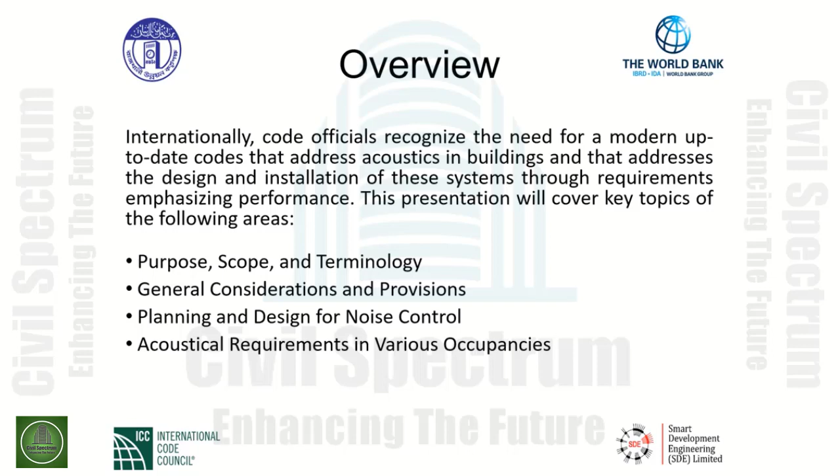The goal of this training is for you to learn and apply key code requirements contained in Chapter 3, titled Building Acoustics, to enhance your performance while inspecting these systems. This training will also provide participants with specific code requirements with examples related to design, installation, and inspection of building acoustic systems to further enhance your knowledge.

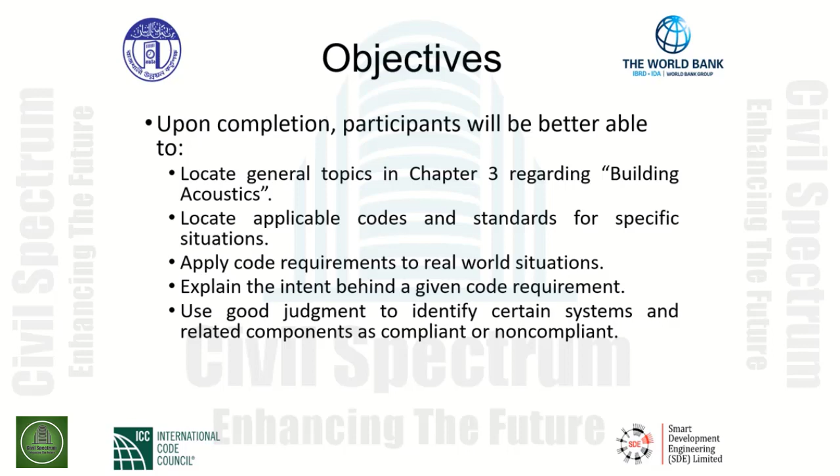Our course objectives today are as follows. Upon completion, participants will be better able to locate general topics in Chapter 3 regarding building acoustics, locate applicable codes and standards for specific situations, apply code requirements to real-world situations, explain the intent behind a given code requirement, and use good judgment to identify certain systems related components as compliant or non-compliant.

Chapter 3, Section 3.1, titled Purpose. The purpose of this chapter is to provide codes, recommendations, and guidelines for fulfilling acoustical requirements in buildings.

A building acoustics code cannot be effective without adequate provisions for its administration and enforcement. Noise transmission can affect the quality of life of a building's inhabitants, and therefore the code official has the responsibility for establishing that these buildings where citizens work and reside are designed and constructed to address building acoustics.

As you can imagine, if we were working in an office building and the mechanical refrigeration room, maybe a chiller room or other equipment, is adjacent to office spaces, this could provide many undue noises transmitting through the building's components and disturb workers while working.

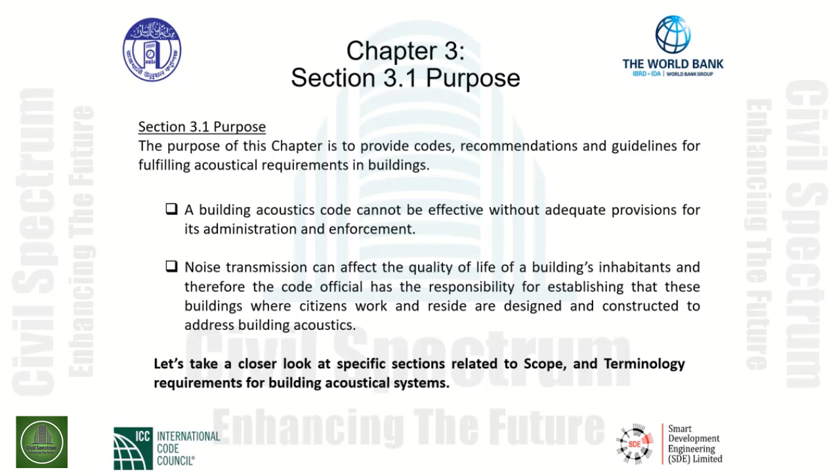We will take a closer look at many of these sections and go through some design examples related to building acoustics, and requirements within this code. Let's take a closer look at specific sections related to scope and terminology requirements for building acoustical systems.

Section 3.2, Scope. This chapter specifies planning, design, and construction codes, recommendations and guidelines on spatial, architectural, and technical aspects of acoustics within or outside buildings to ensure acoustical performance, comfort, and safety. Planning and design aspects are discussed generally and also particularly for buildings with different occupancies.

This section describes the types of building acoustics covered by the code. The code is applicable from the initial design of the system through post-construction where performance is evaluated. Additionally, the scope of the code is primarily focused on building acoustical systems, those items specifically addressed in the code that make a building functional, comfortable, and safe.

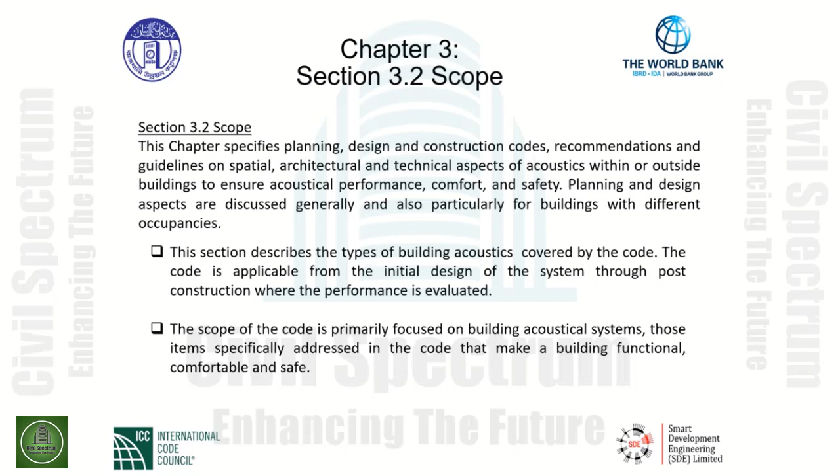Section 3.3, titled Terminology. This section provides meanings and definitions of terms used in and applicable to this chapter of the code. The terms are arranged in alphabetical order. In case of any contradiction between a meaning or a definition given in this section and that in any other part of the code, the meaning or definition specified in this section shall govern for interpretation of the provisions of this section.

A code provision could be misinterpreted if the definition of a term as used in the context of the code is not understood. The following slides will provide key definitions that will assist the code user to properly understand certain terminology related to this chapter.

Codes, by their very nature, are technical documents. As such, literally every word, term, and punctuation mark can add to or change the meaning of the intended result. This chapter contains several terms that are important to understanding the provisions of this code. Definitions are found both in this chapter and throughout the code. Let's look at some key terminology relating to building acoustics.

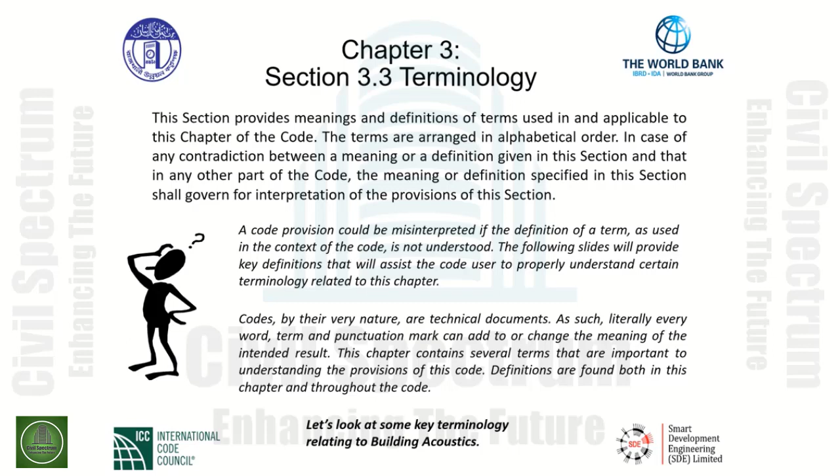The term dBA is a sound pressure level measurement when the signal has been weighted with the frequency response of the A curve. The dBA curve approximates the human ear and is therefore used most in building acoustics. dBA is essentially a weighted scale for referencing loudness that corresponds to the hearing threshold of the human ear. It's a nonlinear curve that's referenced regarding decibels and frequency responses accordingly.

There are other scales that can be used, such as a C-weighted scale, a B-weighted scale, and a Z-weighted scale, but these do not reflect the human ear and the threshold for hearing of human ears.

The next definition is frequency. The frequency of sound is the number of vibrations per second of the molecules of air generated by the vibrating body. One complete movement to and fro of the vibrating body is referred to as a cycle. Frequency is expressed as the number of cycles per second. It is also referred to by its unit as hertz, abbreviated Hz.

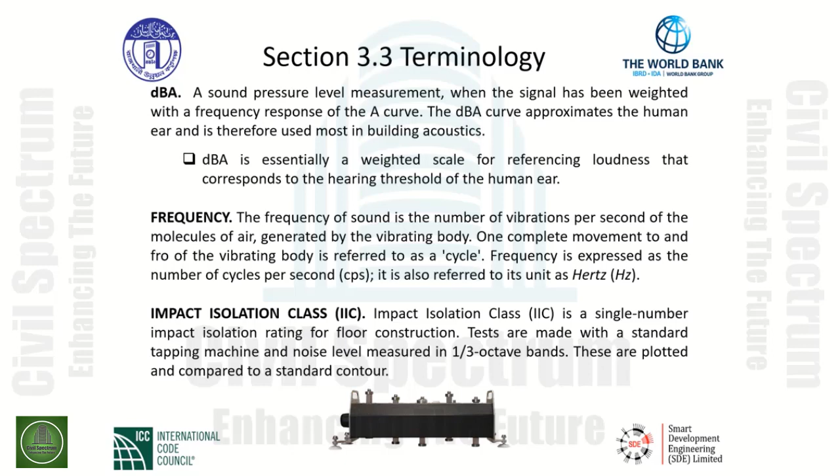Reverberation is the prolongation of sound as a result of successive reflections in an enclosed space, when the source of the sound has stopped. Consider a room with many hard surfaces: once a sound within the room is initiated, the sound will bounce off of very hard surfaces for a prolonged period of time. This is called reverberation.

The reverberation time, RT abbreviated, of a room is defined as the time required for the sound pressure level in a room to decrease by 60 decibels after the sound is stopped, and is calculated by the formula RT equals 0.16 times V over A plus X times V, where RT is the reverberation time in seconds, V is the room volume in meters cubed, A is the total room absorption in meters squared (the unit is Sabin), and X equals the air absorption coefficient.

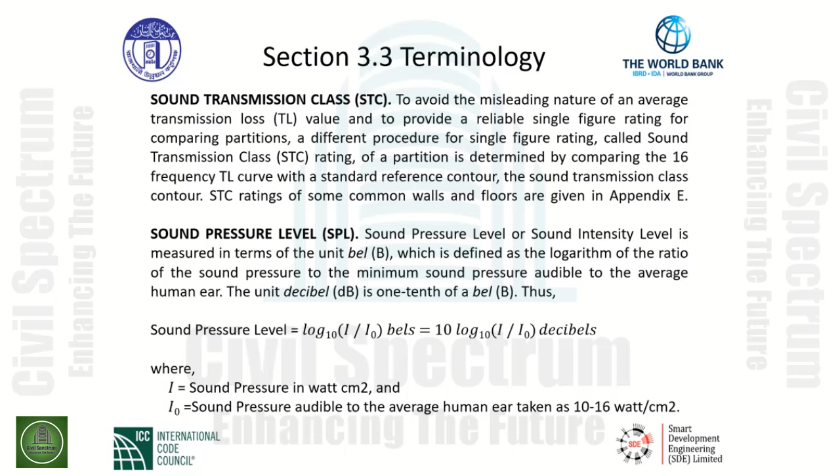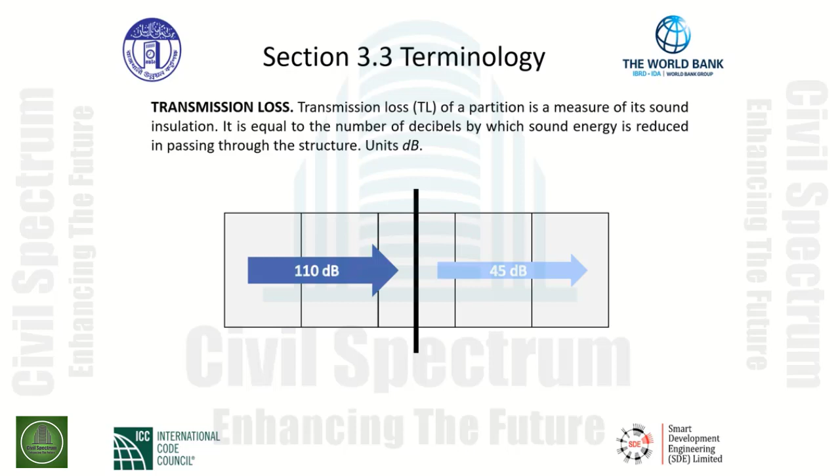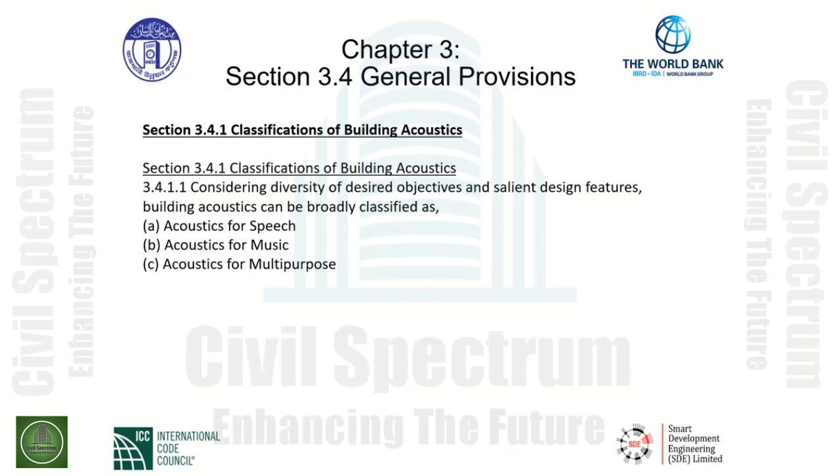A building or building complex is usually a group of spaces or rooms intended for various functions. The requirements of section 3.4.1.2 provide that those spaces may require involvement of different types of acoustics as stated in table 8.3.1. For example, a school has spaces for speech, such as a classroom; music, such as a music room; and multi-purpose, such as an auditorium.

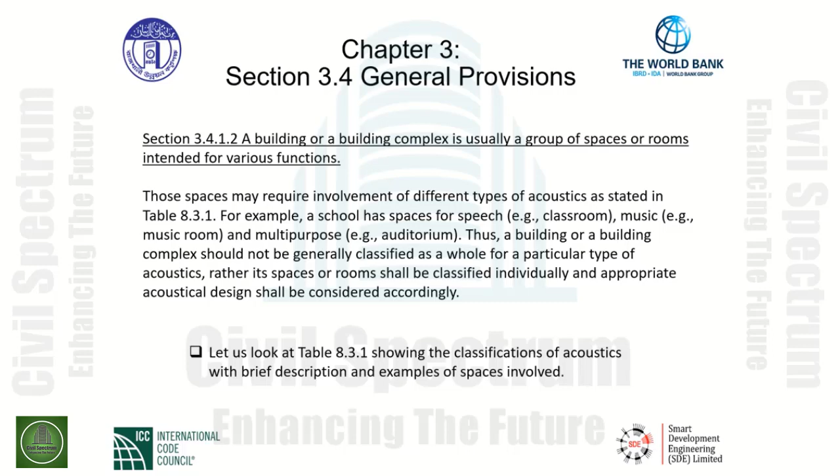Thus, a building or building complex shall not be generally classified as a whole for a particular type of acoustics. Rather, its spaces or rooms shall be classified individually, and appropriate acoustical design shall be considered accordingly. Let us look at table 8.3.1 showing the classifications of acoustics with brief description and examples of spaces involved.

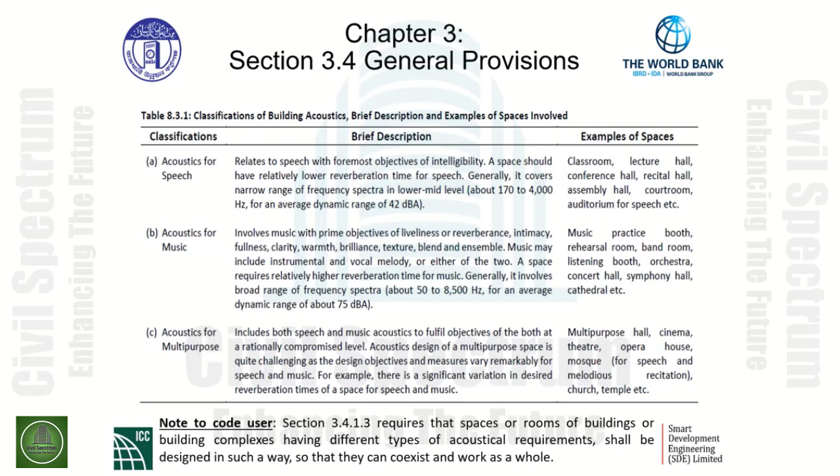Section 3.4.2 is acoustical planning and design targets. Specifically, section 3.4.2.1 states that a space involving either of the acoustical types in section 3.4.1 - speech, music, or multipurpose - must achieve a few design targets. Some of these important design targets are mentioned below.

Item A: noise exceeding allowable limit should be controlled. Item B: speech intelligibility should be satisfactory. Item C: music should have liveliness, intimacy, fullness, clarity, warmth, etc. Item D: the design sound level must be optimum to be heard properly. Item E: diffusion of sound throughout the whole space. Finally, item F: there should be no defects such as echoes, flutter echoes, etc.

Necessary planning and design measures shall be taken for achieving these targets to optimum levels or standards as dictated in this code. This is given to us in section 3.4.2.2, particularly with respect to the planning and design measures.

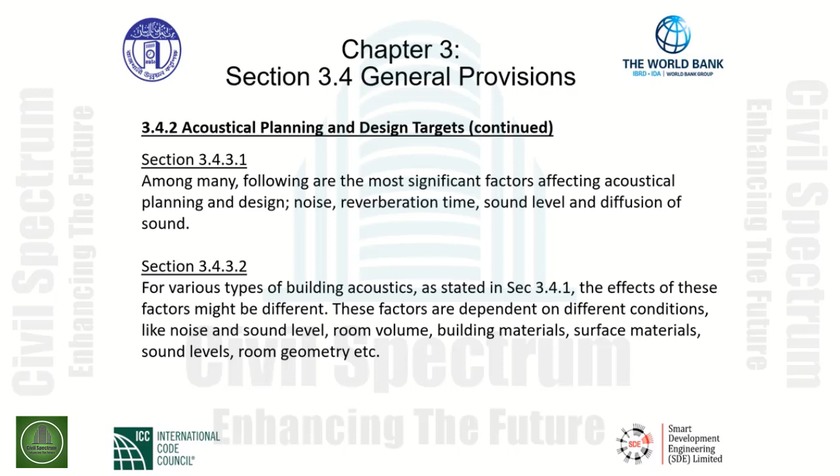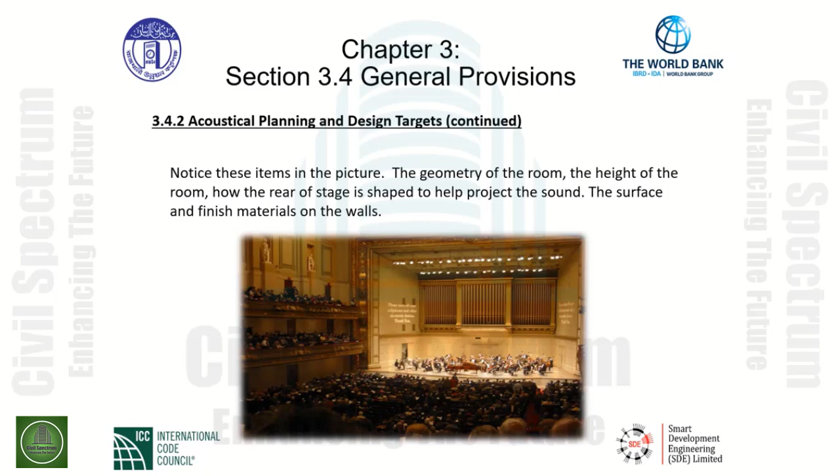General considerations and provisions for planning, design, assessment, and construction are stated specifically in section 3.4.4. Moving through this section, the very first section is 3.4.4.1. A reference is given here in Appendix F. A flow diagram summarizes activities required for planning, design, assessments, and construction related to building acoustics. We will be taking a look at Appendix F and the flow diagram coming up.

Section 3.4.4.2 indicates that acoustical planning and design, including all parts and details, shall be performed during the design phase of any project and must comply with standards and codes as dictated in this code.

Periodically, the code will indicate other forms of design, guides, standards, and references, typically in the appendices. The designer must take this into account and design accordingly.

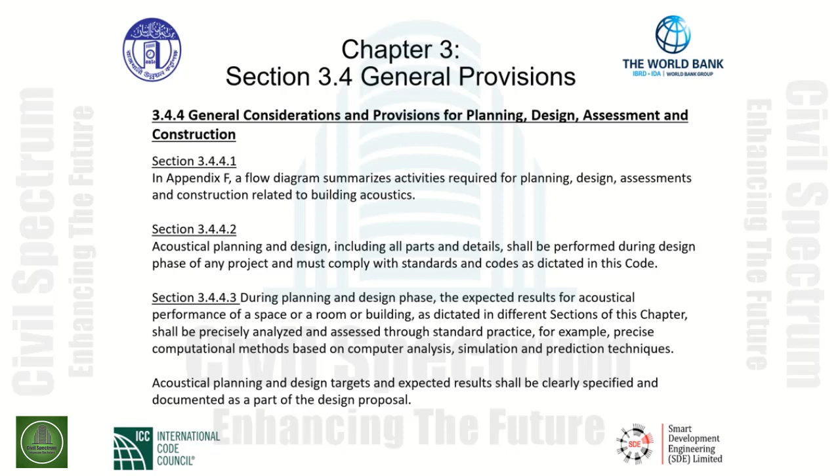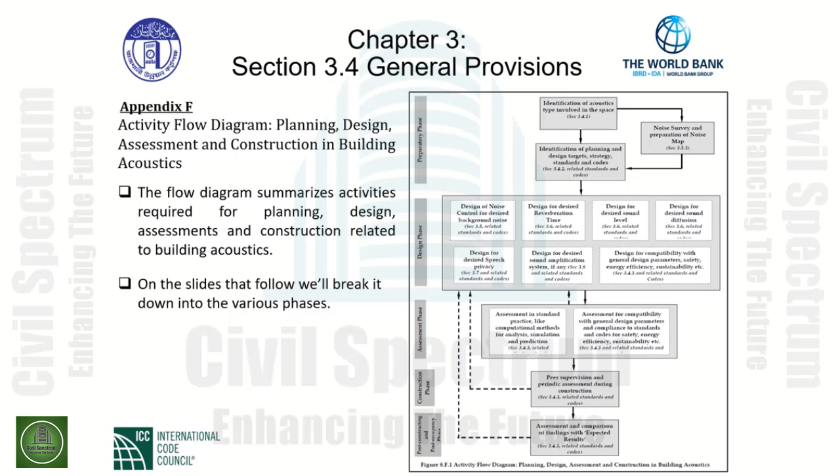The preparatory phase starts at the very top of the flow chart, where the engineer must identify the type of acoustics involved in the space. There's a reference to section 3.4.1, the area where classification of building acoustics is indicated. We need to consider the diversity of the desired objectives and the salient design features of the building acoustics. They are classified as acoustics for speech, acoustics for music, and acoustics for multi-purpose areas.

From that point, the identification of planning and design targets, strategy, standards, and codes comes in as part of the preparatory phase as well. The reference here is section 3.4.2, which covers acoustical planning and design targets. This is where we must achieve a few design targets.

Some of the design targets included: noise exceeding the allowable limit needs to be controlled; speech intelligibility must be satisfactory with respect to the design; music type classifications must have liveliness, fullness, and clarity; the desired sound level must be optimum to be heard properly, as well as diffusion of sound throughout the whole space must be taken into consideration. There also should be no defects such as echoing or flutter-type echo.

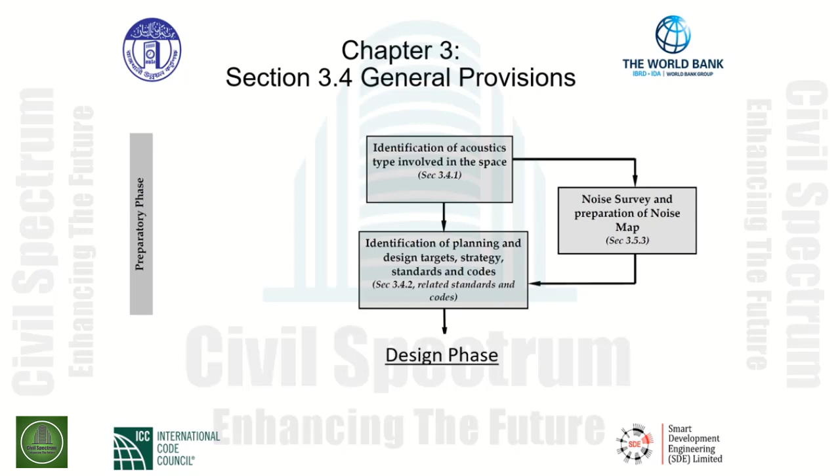The design phase: from the preparatory phase, we now integrate our findings and analysis into the design phase part of the flowchart. Here, the specific design criteria, strategies, and code requirements from the preparatory phase are put into play. This chart provides specific code-related criteria and relevant sections to find those criteria, which include the design of noise control for desired background noise.

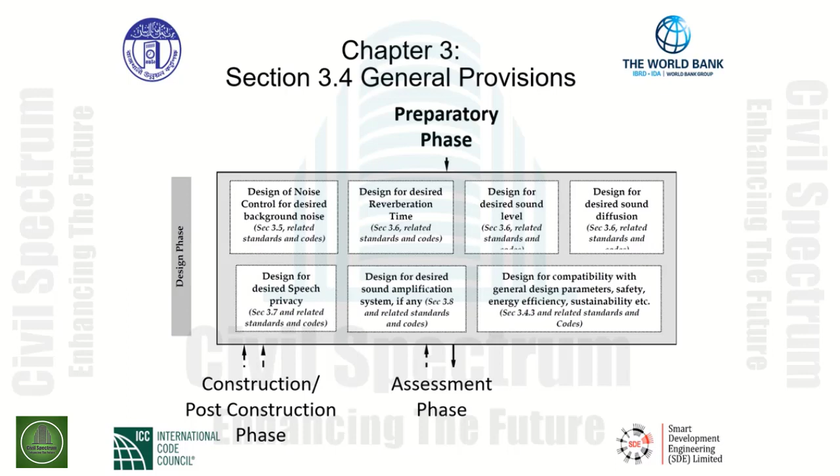Design for desired reverberation time, design for desired sound levels, design for sound diffusion at desired levels, as well as design for desired speech privacy and sound amplification systems if applicable, and design for compatibility with general design parameters such as safety, energy efficiency, sustainability, etc.

The last categories of the flowchart consist of the assessment, construction, post-construction, and post-occupancy phases. During the assessment phase, the design is reviewed and further analyzed to verify the desired acoustical performance. If during the assessment, portions or all of the design are found to be incorrect or need modification, the project will go back to the design phase for correction.

Once through the assessment phase, the project moves to the construction phase, where periodic assessment of the actual acoustic performance of the design is conducted. If during these assessments the performance is determined to not be acceptable, it will go back to the design phase again for redesign of non-compliant portions. In the post-construction phase, the final assessment is completed to verify the expected results from the design.

Section 3.5, Planning and Design for Noise Control. Types of noise is specifically referenced in Section 3.5.1. Depending on the location of the source, noise might be of two types.

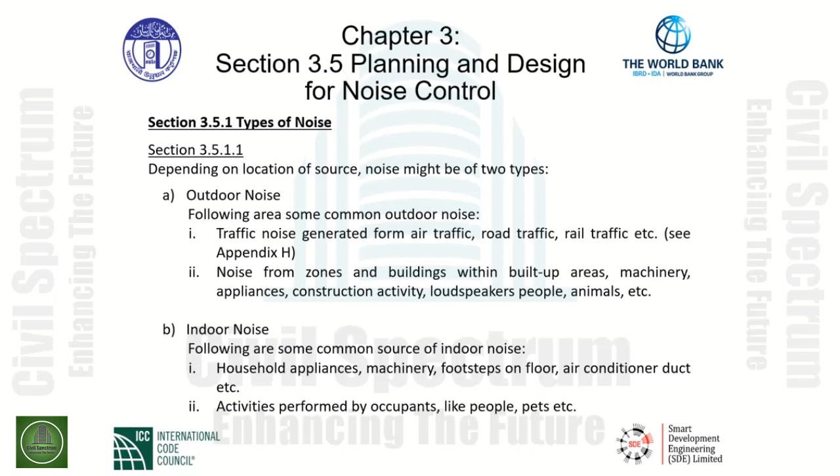Design sequence for noise control, Section 3.5.2, 3.5.1.1. In order to achieve noise control effectively, measures should be taken in the following order.

Item A, suppression of noise at its source. If the designer or the analysis shows that there is a projection of noise at a source, this may be the area to provide some sound attenuation.

B, layout planning is of concern as well. Simply by changing the layout direction, this may significantly reduce noise effects.

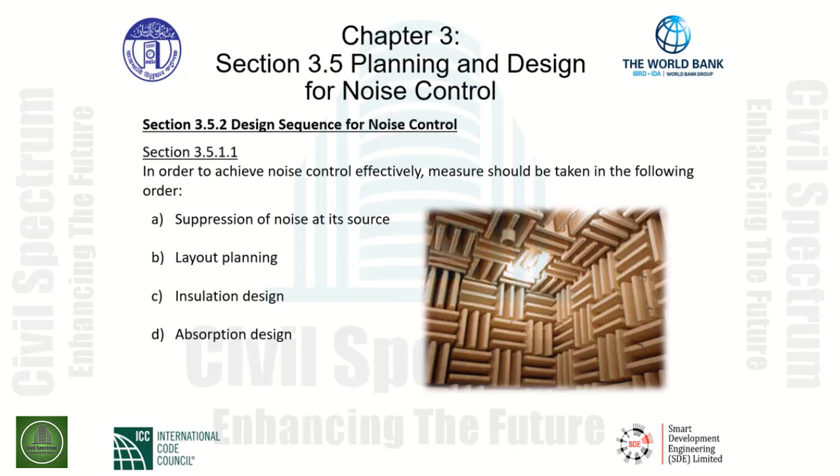Item C, insulation design, maybe by encapsulating the volume of the area with sound insulation. This may be an option with respect to noise transmission. Absorption design as well is indicated in item D. So there are various different sequences for designing noise control.

A noise survey is indicated in section 3.5.3.4. A noise survey shall be conducted and a noise map shall be prepared to identify source type, intensity, frequency, and other parameters of noise in and around the site of any specific project.

Noise levels should be measured for peak and off-peak hours of both working days and holidays, and also for daytime and nighttime as defined in Noise Pollution Control Rules 2006 and its subsequent amendments by the Government of the People's Republic of Bangladesh.

The reference here is to see Table 8.H.1 in Appendix H. The noise level shall be analyzed statistically for the following values.

Section 3.5.3.5, a noise map shall be used to examine compliance to the permissible upper limit of noise levels set for different land use zones in the Noise Pollution Control Rules 2006 and its subsequent amendments by the Government of the People's Republic of Bangladesh.

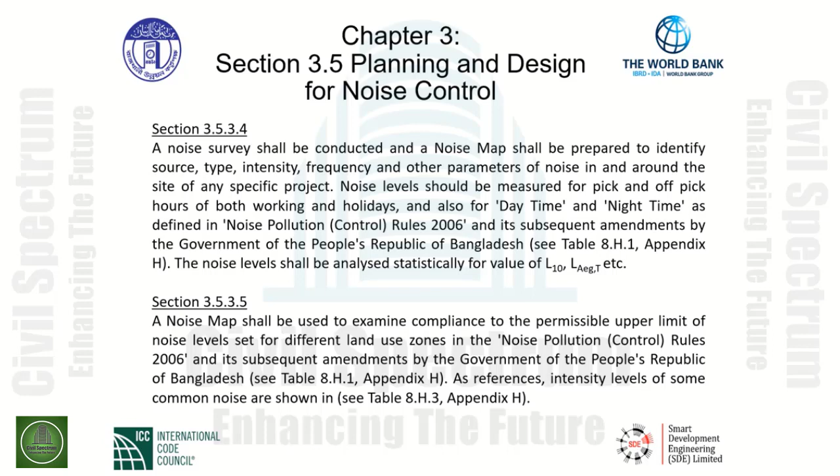Appendix H, specifically Table 8.H.1, titled Allowable Upper Limit of Outdoor Noise Levels. In the category of zones, we have the quiet zone, the residential zone, mixed use zone, commercial zone, and industrial zone. The upper limit of noise level in dBA is indicated for daytime and nighttime.

The daytime range is given from 6 a.m. to 9 p.m. The nighttime range is given in the last column from 9 o'clock p.m. to 6 o'clock a.m. For a quiet zone, in the daytime interval between 6 o'clock a.m.

and 9 o'clock p.m., we have an upper limit noise level of 50 dBA. The nighttime maximum upper limit noise level between 9 o'clock p.m. and 6 o'clock a.m. is an upper limit of 40 dBA.

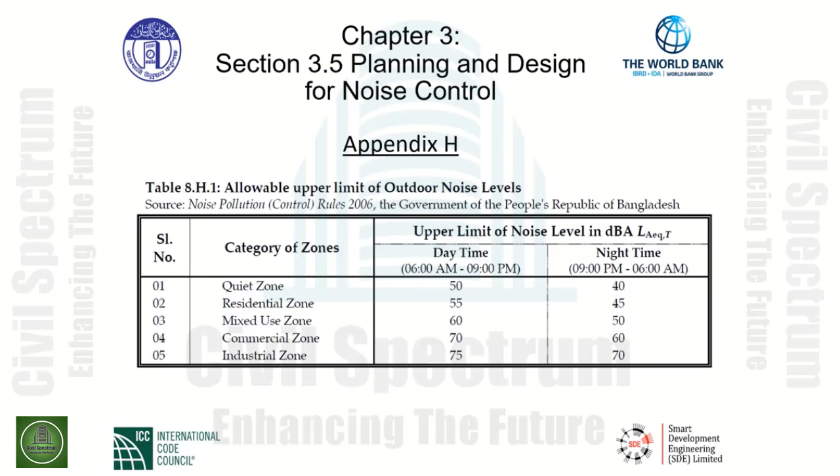When we look to an example such as a residential zone, the daytime upper limit is given at 55 dBA, where the nighttime is decreased by 10 dBA and has an upper limit of 45 dBA. The commercial zone indicates a daytime upper limit noise level of 70 dBA and a nighttime upper limit of 60 dBA. This table allows the designer to provide the design for these particular categories of zones, allowing upper limits indicated for daytime and nighttime operations.

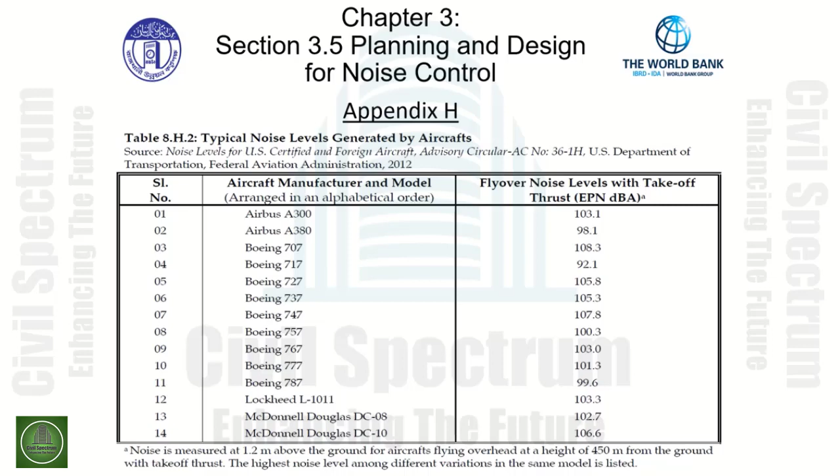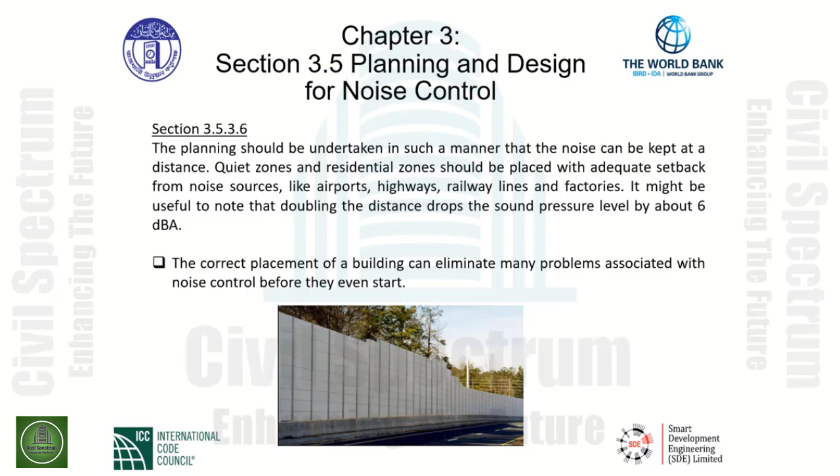The correct placement of a building can eliminate many problems associated with noise control before they even start. This way, it's advised that engineers analyze the site thoroughly for building placement along with the other designers, which could eliminate any noise problems simply by the orientation of the building and their respective areas of use within the building.

Let's consider a site where an apartment building will be located. The site is adjacent to a freeway. At 5 meters from the freeway, the sound pressure level was measured at 70 dBA. How far away does the building need to be located from the freeway to reduce the sound to 46 dBA? Let's apply the general rule of thumb of a 6 dBA reduction every time the distance is doubled.

At 10 meters, the sound level would be 70 dBA minus 6 dBA, resulting in 64 dBA. At 20 meters, the sound level would be 64 dBA minus 6 dBA, resulting in 58 dBA. At 40 meters, the sound level would be 58 dBA minus 6 dBA, resulting in 52 dBA.

We need to go through one more iteration and evaluate the building being at 80 meters away, and the sound level would be 52 dBA minus 6 dBA, resulting in our value of 46 dBA of sound pressure. The correct answer is approximately 80 meters, given this rule of thumb.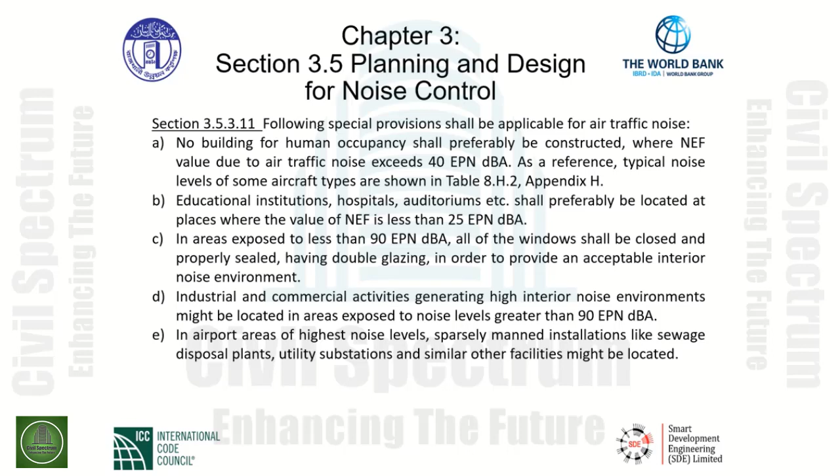Regarding road traffic noise, Section 3.5.3.12 provides us the following provisions. Item A, for road traffic noise level, the value of L10 shall be limited to a maximum of 70 dBA for zoning and planning new buildings in urban areas, while dwellings are proposed to have sealed windows.

B, the maximum permissible upper limit of L10 shall be reduced to 60 dBA when the dwellings are proposed to have open windows. As you can see, there's a reduction in dBA.

Item C. Major new residential developments shall preferably be located in areas where L10 levels are substantially lower than those specified above. Where L10 is greater than 70 dBA, design solutions such as barrier blocks, noise buffers, or purpose built noise barriers shall be utilized in order to reduce noise levels at least to that level.

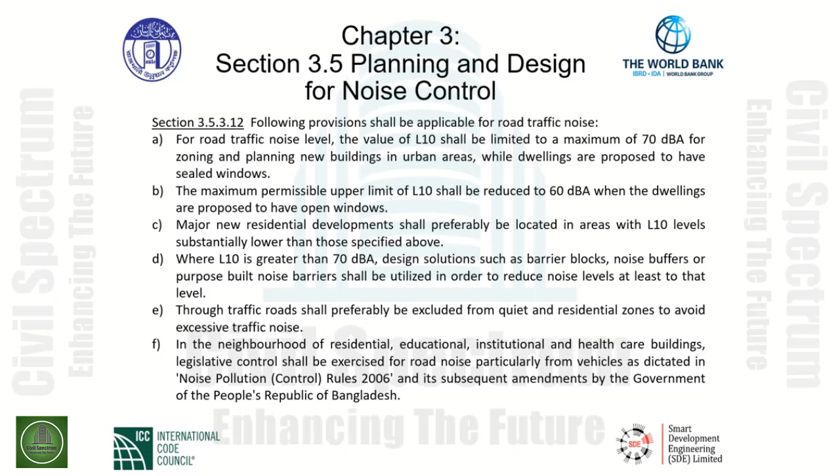And finally, item E. Through traffic roads shall preferably be excluded from quiet and residential zones to avoid excessive traffic noise. Item F. In the neighborhood of residential, educational, institutional, and healthcare buildings, legislative control shall be exercised for road noise, particularly from vehicles as dictated in Noise Pollution Rules 2006 and its subsequent amendments by the Government of the People's Republic of Bangladesh.

When it comes to rail traffic noise, Section 3.5.3.13 is referenced with the following provisions. Item A. No residential or public building except for the railway station and its ancillary structures shall preferably be connected to the railway lines.

Item B. Mercantile or commercial buildings should not abut the railway lines or the marshalling yards. Only planned industrial zones may be located beside the railway tracks.

Item C. In order to reduce the high noise levels produced at the arrival and departure of trains, platforms in railway stations shall be treated with sound-absorbing materials, particularly on the ceiling.

D indicates the main platform floor shall be separated from the station building with a minimum gap of 50 millimeters so that the ground or structure-borne vibrations are not transmitted to the building.

Item E. Windows and other openings shall preferably be placed as less as possible in the facade along the railway tracks. Item F. Greenbelts, landscaping, or any other form of barrier might be developed along the railway lines.

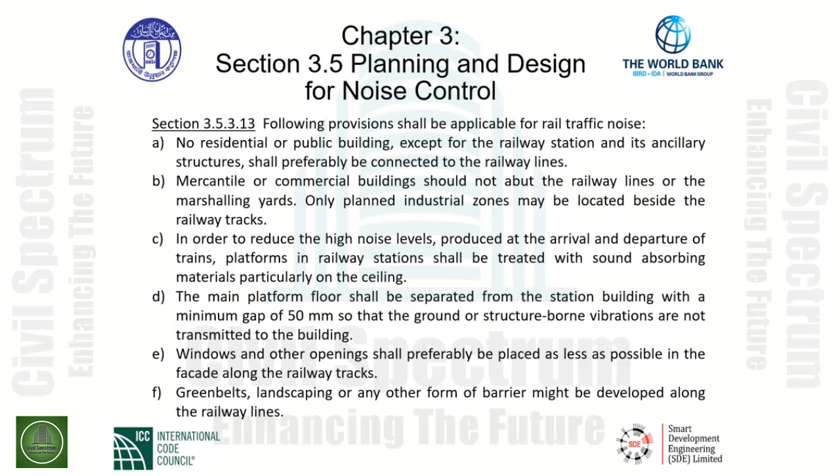Section 3.5.4 Planning and Design for Indoor Noise Control. The allowable upper limits of indoor background noise levels in dBA are shown in Table 8.3.2 and Figure 8D.1 in Appendix D. Design shall comply with recommended range of balanced noise criteria, the NCB curve, for different types of activity.

The allowable upper limits of indoor background noise levels in dBA are shown in Table 8.3.2 below. This indicates in the first column the type of space, such as broadcasting and recording studios. The dBA would be 18, and if we plot this on the NCB curve, we would have a value of 10.

The type of space, such as a classroom, a library, or even a small office, will give us a dBA ranging between 38 and 48. And the resulting curve, the NCB curve, would range between 30 and 40 on that particular curve.

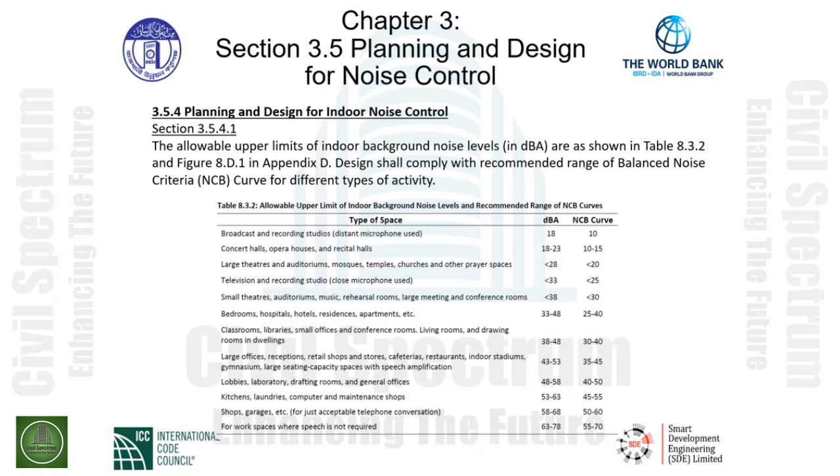Shops, kitchens, lobbies, and other workspaces where speech is not critical. So this is based on the type of space, and this is the allowable upper limit values regarding these spaces indicated in tabular form.

From Appendix D, a balanced noise criteria curve is pictured below, is used to specify acceptable background noise levels in occupied spaces. Instead of just a straight decibel pressure level, each decibel level is plotted over a frequency range. As you can see from the curve, at a lower frequency, a much higher decibel level of background noise is acceptable versus the same decibel level at a high frequency.

The recommended sound insulation criteria are classified in some grades given to us in section 3.5.5.1. The STC value for airborne sound insulation is graded as stated below. We are also referred to figure 8.D.2 in Appendix D. Item A, grade 1.

STC equals 55. Apply mainly to fully residential, quiet, rural, and suburban areas, and in certain luxury apartment buildings. This is grade 1.

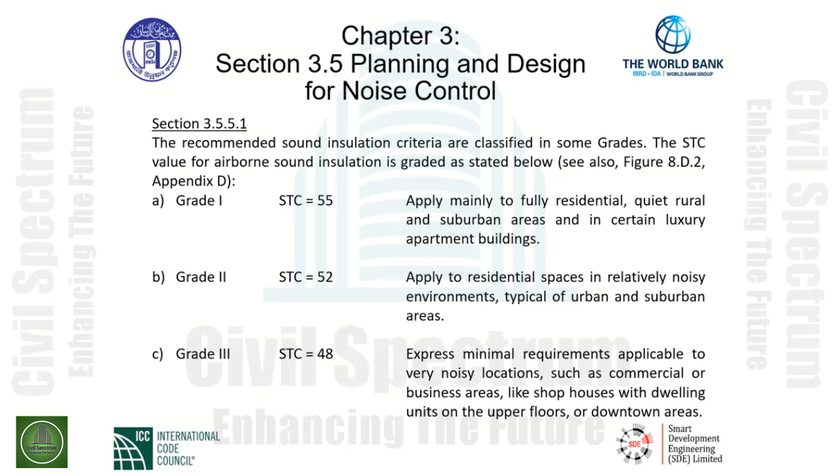Pictured here is a sample of a sound transmission class test. The test is conducted with measuring devices in two rooms, one source room and one receiving room. The sound pressure levels in both rooms are compared at one-third octave band frequencies from 125 to 4,000 Hertz. The difference between the rooms is used to calculate the transmission loss at the various frequency bands.

These transmission loss values, noted as ATL in the table, are plotted on a graph and compared to standard STC contours. Whichever curve is most closely resembled is the STC rating assigned to the assembly.

As we look at the graph, the solid line is the transmission loss values plotted at the various frequencies, and the dashed line is the standard curve for an STC of 56.

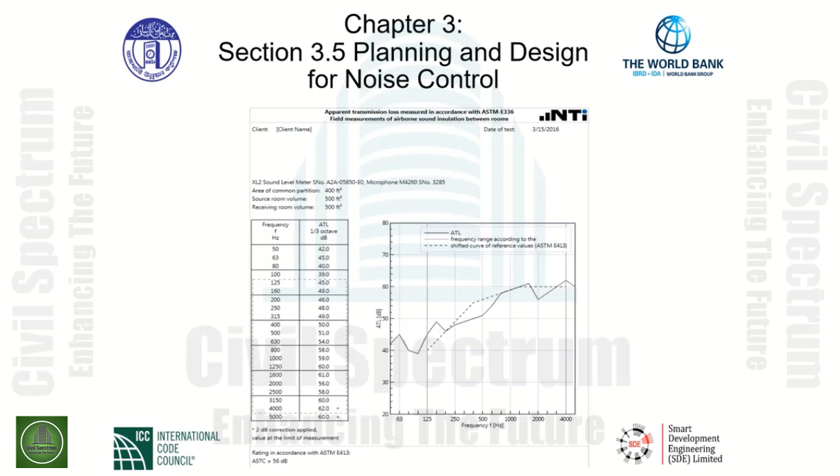The following tables are located in Appendix D and provide the approximate range of airborne sound insulation and impact sound insulation required or recommended between dwelling units. Sound transmission class deals with transmission of airborne sound, typically through walls, while impact insulation class deals with impact sound, typically through floors. So we need to make a distinguishing mark between the two.

With impact sound, as indicated, in both cases the higher rating signifies a better level of soundproofing. The grades of STC and IIC are also provided that align with the code.

As we look at the tables and graphs indicated here, we note in the first table we have our sound transmission loss in dB. The various grades are indicated towards the bottom of the table: grade 1, grade 2, and grade 3. This gives us the recommended sound insulation criteria found in section 3.5.5.1.

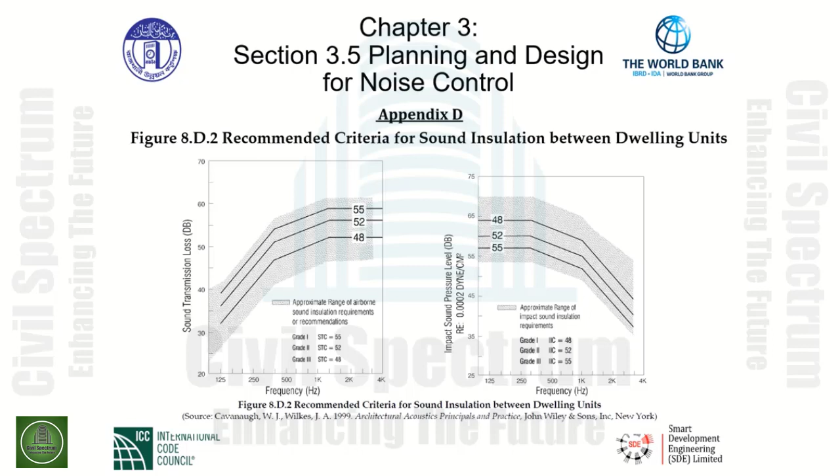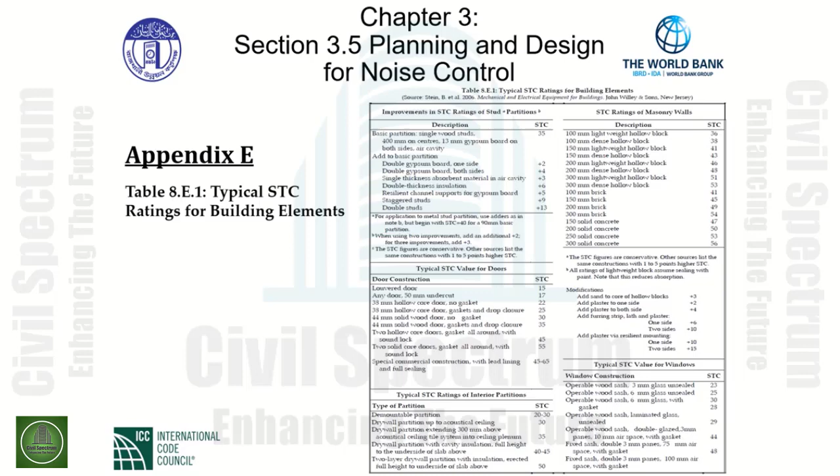As an example, using table 8.E.1 from the previous slide, design an improvement to STC ratings of stud partitions. Starting with the basic partition value of 35, increase the partition value to at least 46. Option 1: let's try adding resilient channel supports over the studs and adding an additional layer of gypsum board to both sides.

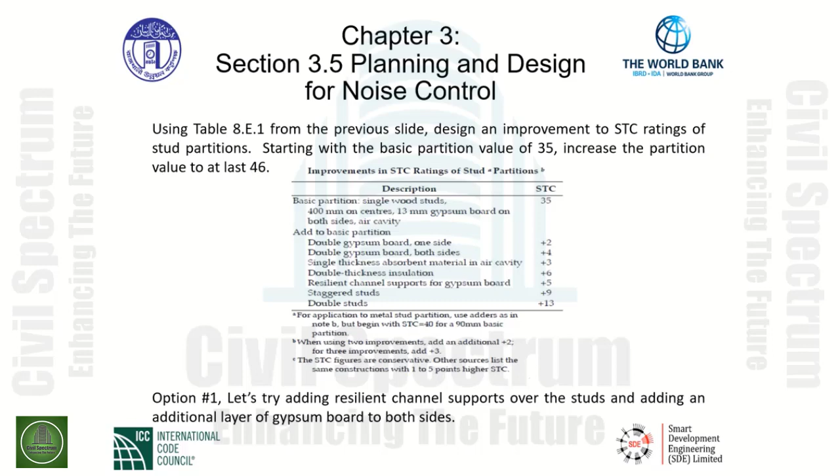As indicated, we take the basic partition, single wood studs at a base 35 STC rating. We add double gypsum board to both sides, which gives a value of +4, and resilient channel supports for the gypsum board add an additional 5. The total STC rating would then be 35 plus 4 for the double gypsum board plus 5 for the resilient channel supports, equating to 44, which is less than our needed 46.

It appears we still need additional improvements. Let's look at the table again. Upon following the table and locating note B below, we need to apply this particular note. Note B says when using 2 improvements, add an additional +2; for 3 improvements, add +3. For our particular method, we have 2 improvements, so we will add an additional +2 to our overall summation.

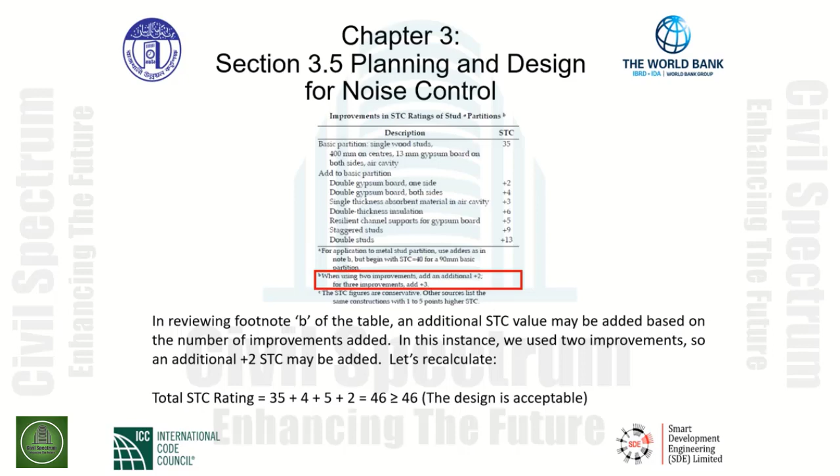Let's look at another option. Option number 2: let's substitute metal studs in lieu of wood studs, add an additional layer of gypsum board to one side, and install a single thickness absorbent material in the air cavity. When we do this, the first approach is to reference Note A to the table. It indicates for application to metal stud partitions, use adders in Note B, but begin with STC 40 for a 90 millimeter basic partition, and this is what we are going to utilize.

We're going to start with 40 in our equation and take the summation of various values to get the total STC of our assembly. From 40, we add 2 for the double gypsum board on one side. We add 3 for the single thickness absorbent material in the air cavity. And then we add 2 according to Note B of the table, which again indicates when using 2 improvements, add an additional +2. Therefore, our design is 47, which is greater than our resulting value previously of 46, and therefore the design is acceptable using metal studs with double gypsum board on one side and single thickness absorbent material in the air cavity.

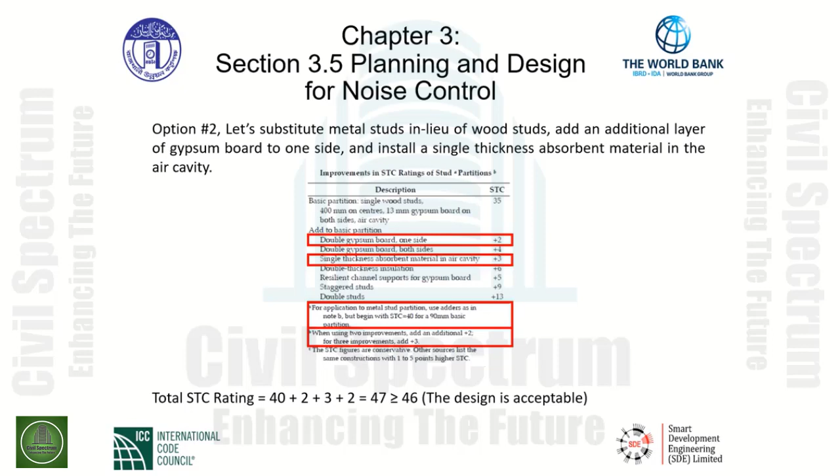Another table, such as Table 8.E.2, is also located in Appendix E and provides STC ratings for various occupancies and the spaces within those occupancies. The first column lists the different types of occupancy. The next column is the room within that occupancy under consideration, such as the main room or loud rooms within the occupancy. The third column is the space or room that is immediately adjacent to and separated from the room under consideration.

The next two columns, quiet and normal sound isolation respectively, are the STC values to be provided between the room under consideration and the adjacent areas.

As an example, we will apply the table as indicated for the type of occupancy. In our case, let's go down the table to executive areas, doctor suites, confidential privacy requirements. The wall, partition, or panel between these particular rooms of an office, when adjacent to the office we have a corridor or lobby indicated in the adjacent area column, the sound isolation requirement background level in the room being considered gives us a quiet STC rating of 45 or a normal rating of STC 42.

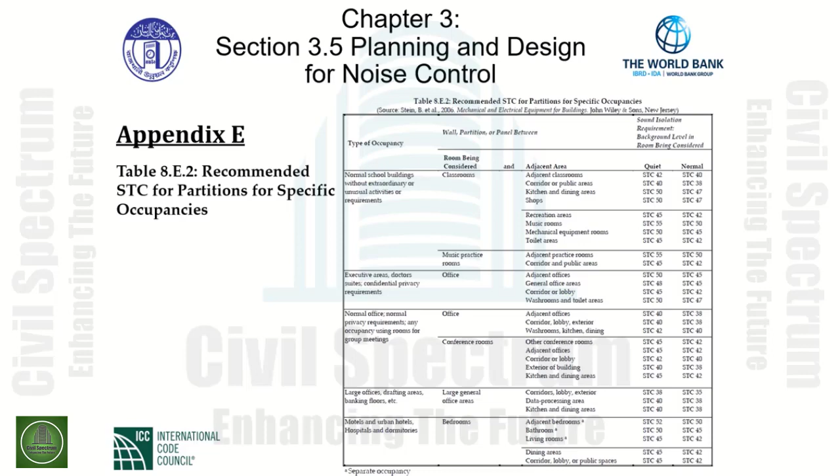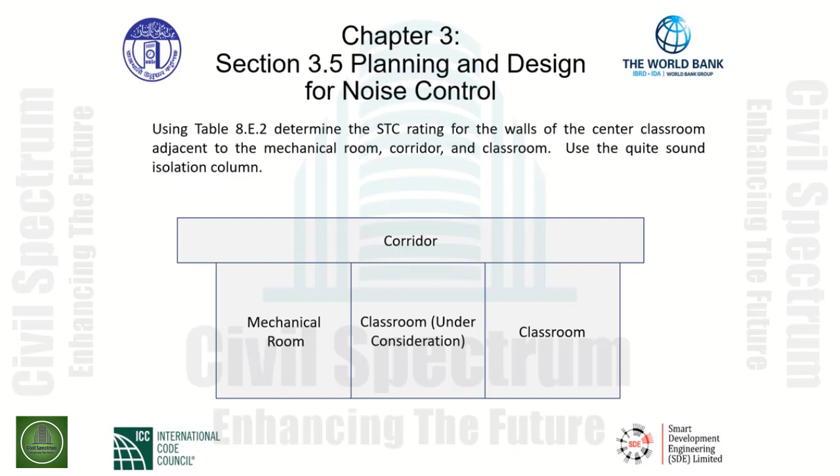Using Table 8.E.2, determine the STC rating for the walls of the center classroom adjacent to the mechanical room, corridor, and classroom. Use the quiet sound isolation column for this particular design. In this example, let's assume we have a classroom located in a school, with a mechanical room, classroom, and a corridor surrounding the classroom. From the previous table, let's determine the minimum STC rating for each wall.

We need to start with the room under consideration to navigate the correct portion of the table. Once there, we need to look at the adjacent area and match it to the actual use of the adjacent area. Once we locate the correct adjacent area, we follow that row over to the sound isolation requirement. In this case, we are directed to use the quiet column, so that's the value we will select.

The classrooms are indicated as the room being considered, as shown in the red box. The adjacent area to the classroom is an adjacent classroom. We will pick the STC value of 42 in the quiet column for the adjacent classroom. For the corridor or public areas, we will pick the STC rating of 40, again in the quiet column.

We move down to the lower level of the table to the mechanical equipment room that is adjacent to the classroom. We will pick an STC rating of 50 for the classroom separating the mechanical closet, as indicated.

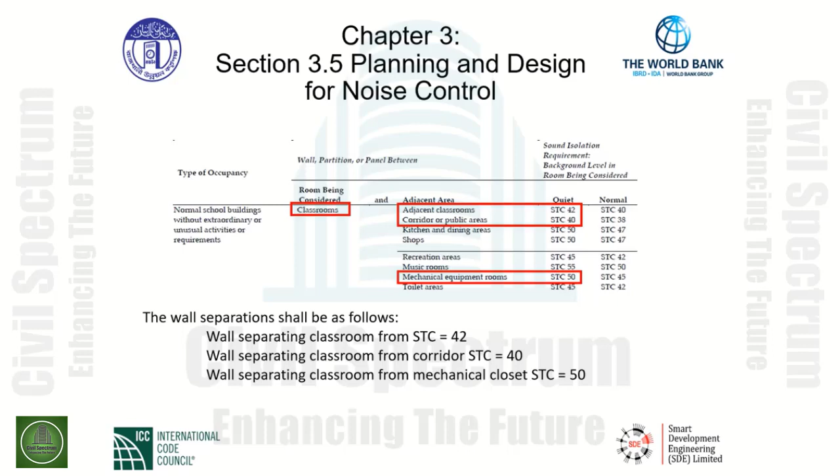Impact noise problems can be controlled in the following ways, given to us in section 3.5.6.1.

Preventing or minimizing the impact by cushioning it with resilient materials like floor tiles of rubber and cork, or carpeting on pads, with desired impact isolation class criteria for airborne and impact sound insulation of floor ceiling assemblies between dwelling units, tables 8.33 and 8.34.

Item B, floating the floor for isolating the impact floor from the structural floor by a resilient element is extremely effective. This element can be rubber or mineral wool batts, blankets, or special spring metal sleepers.

Item C, suspending the ceiling and using an absorber in the cavity. Item D, isolating all rigid structures such as pipes and caulking penetrations with resilient sealing.

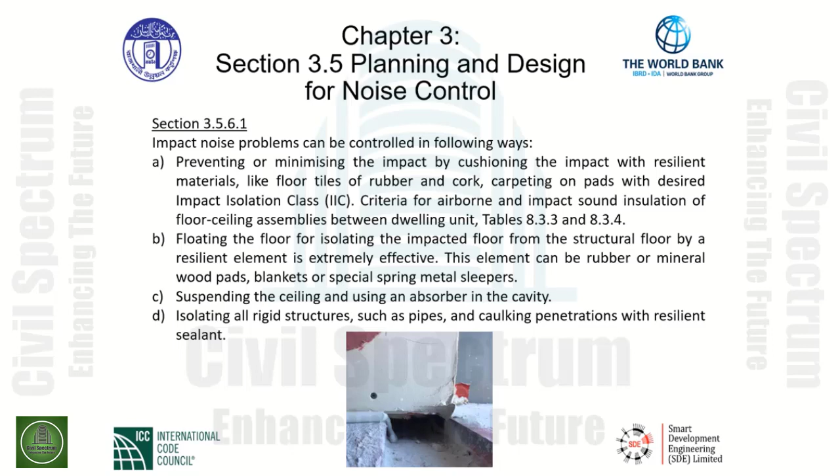Table 8.3.3, titled Airborne Sound Insulation of Partitions Between Dwelling Units. This table gives us requirements for partitions in dwelling units. For example, consider two apartments, A and B, that share a common wall.

A living room is located on the apartment A side of the wall, while a bedroom is located on apartment side B. I can locate this scenario in the table and determine the STC requirement. In this case, it is 54. Note that the STC is provided for grade 2.

Per the note of the table, if grade 1 or 3 were desired, I would add or subtract the value given. Also note that per note A, if there is a situation where spaces overlap and multiple STC values apply, the strictest will govern the rating of the partition. Notes are effective to the table.

Let's look at note A. Note A indicates wherever a partition wall may serve to separate several functional spaces, the highest criterion must prevail. Just above note A, it indicates for grade 1, add 3 points; for grade 3, subtract 4 points. As we can see, the third column of the table is based upon grade 2 STC requirements.

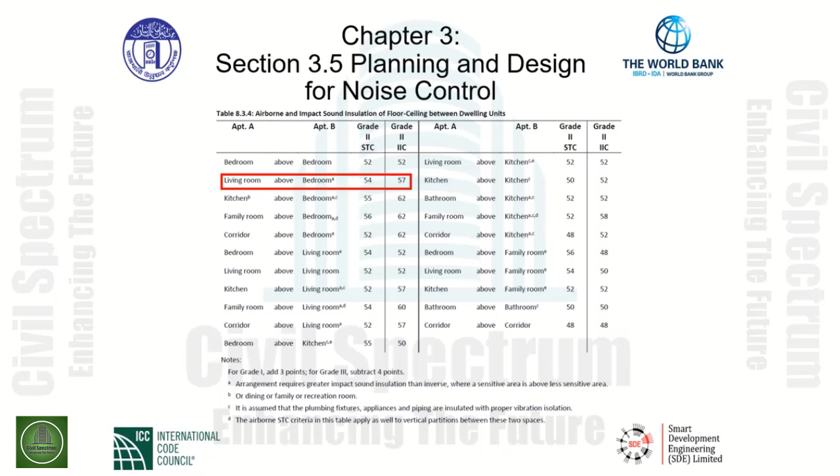Protection against the effects of noise exposure is given to us in section 3.5.8.1. We must protect against any type of noise exposure, provided when the sound level exceeds those shown in table 8.3.5.

Table 8.3.5 is given to us below, indicated as permissible noise exposure. The first column gives a sound level in dBA, which is a slow response. It ranges from 85 to 97 dBA. This is permissible noise exposure.

The duration is given in the second column, duration per day in hours and minutes. The permissible noise exposure at 85 decibels would give us a duration per day of 16 hours, 0 minutes. Whereas if we go down to 97 dBA, we have a duration per day of 3 hours, 2 minutes.

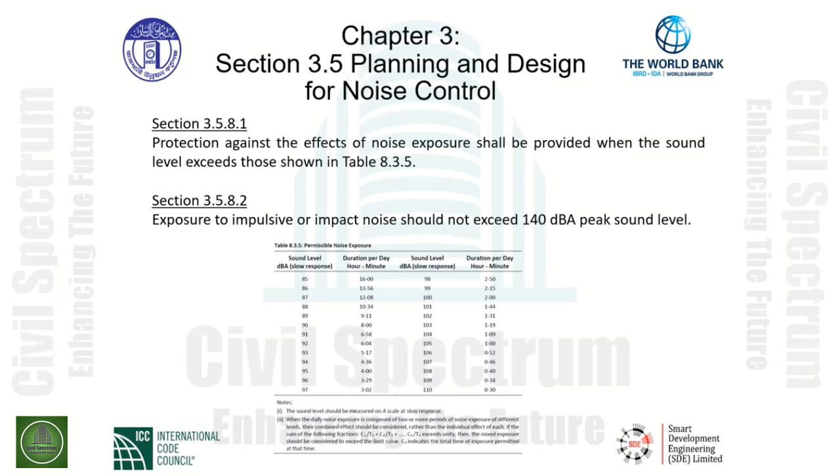Section 3.6, Reverberation Time, Sound Pressure Level, and Diffusion of Sound. General considerations are given in Section 3.6.1. For an overall performing, comfortable, and safe acoustical environment, along with the issues of noise, other significant aspects of acoustics should be considered. This shall include sound pressure level, reverberation time, and diffusion of sound.

Speech intelligibility is a significant parameter to achieve satisfactory acoustical design. Percentage syllable articulation, or PSA, is an index for assessing speech intelligibility. PSA can be expressed as the following. For English language, PSA equals 96 times the coefficients for average speech level, indicated in percentage. For Bangla language, PSA equals 93 times the coefficients for the average speech level.

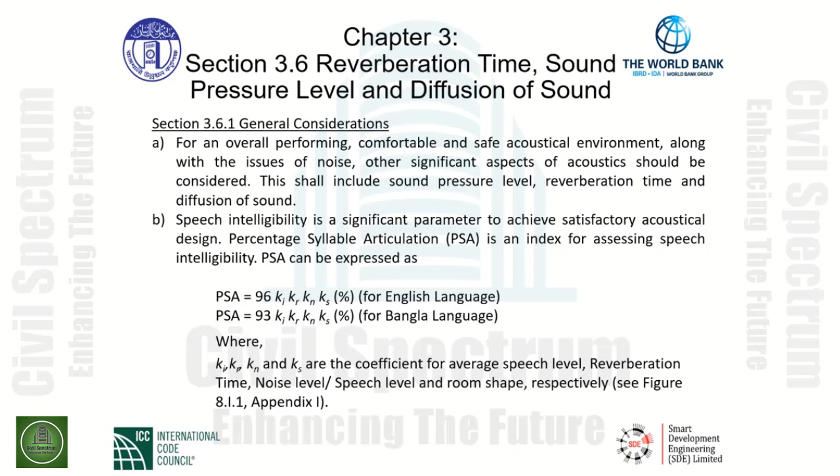The speech level, PSA, and liveliness indicators and coefficients can be determined from Appendix I, Figure 8.I.1 in Appendix I. These tables are located in Appendix I and provide the curves to determine speech level coefficients, reverberation time coefficient, and noise level coefficient for use in determining the percentage syllable articulation, or PSA.

As we can see, curve A has a solid line, which is a speech level coefficient. The dotted line is the PSA versus speech level. Curve B gives us the reverberation time coefficient, K sub R. Curve C gives us the noise level coefficient, K sub N. Solid line is the speaker and listener in noise. The dotted line is only listener in noise.

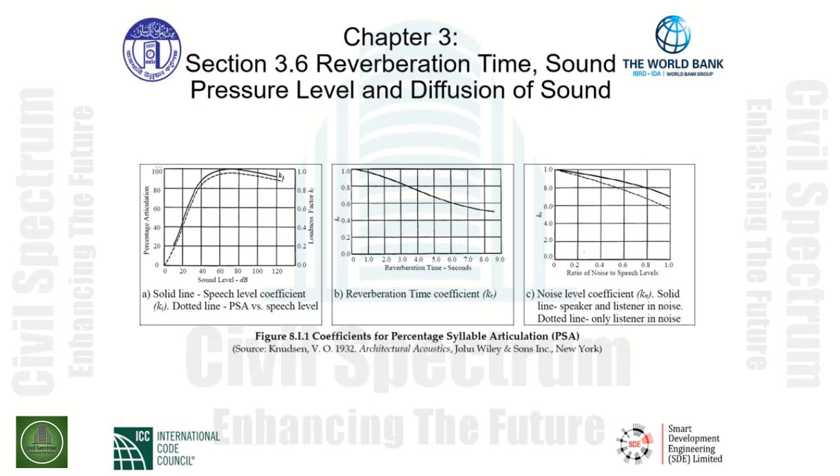As an example, determine the speech level, reverberation time, and noise level coefficients given a sound level of 50 dB speech level, a reverberation time of 1 second, and a ratio of noise to speech level of 0.4, only listener in noise.

The first curve, A, we take the sound level in dB of 50. We rise up vertically until we intersect the curve. Once we intersect the curve, we move horizontally to the right and find that particular value, around 0.97, as our loudness factor. That would be K sub I as a coefficient.

The next, curve B, reverberation time coefficient. We need to find K sub R. We take the reverberation time in seconds given to us as 1 second, move up vertically until we intersect the curve, move horizontally to the left, and again we have a value of 0.97. This is our reverberation time coefficient, K sub R.

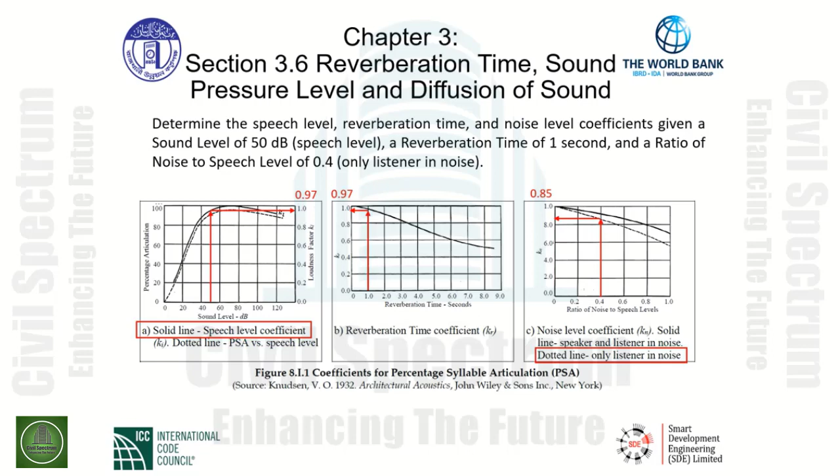Last, we have our noise level coefficient, K sub N. We need to go to the dotted line. This is for only listener in noise. We have a ratio of noise to speech level given to us of 0.4. On the x-axis, we find 0.4, rise vertically to the intersection of the dotted curve, and move horizontally to the left, and we read K sub N at 0.85 as our coefficient for ratio of noise to speech level.

Section 3.7.2.1. For speech sound, a descriptive scale is shown in Table 8.3.6. This provides a system of ranking the relative quality of sound isolation. The relative quality can be ranked 0 to 6, with 6 being total privacy, where a shout is barely audible, and a 0 providing none, which is a normal voice level, is always intelligible. As we see, the table is made up of the ranking in the first column from 6 down to 0. The descriptor is given in the second column for total privacy at a ranking of 6 and none as a ranking of 0. The hearing condition is indicated based upon the ranking and the descriptor accordingly.

For a ranking of 6, shouting is barely audible. A ranking of 5 would be excellent; normal voice levels are not audible, raised voices barely audible but not intelligible. As we go down from 6 all the way down to 1 as a ranking, this would be a poor descriptor, in which case our hearing condition would be normal voice levels are audible and intelligible most of the time.

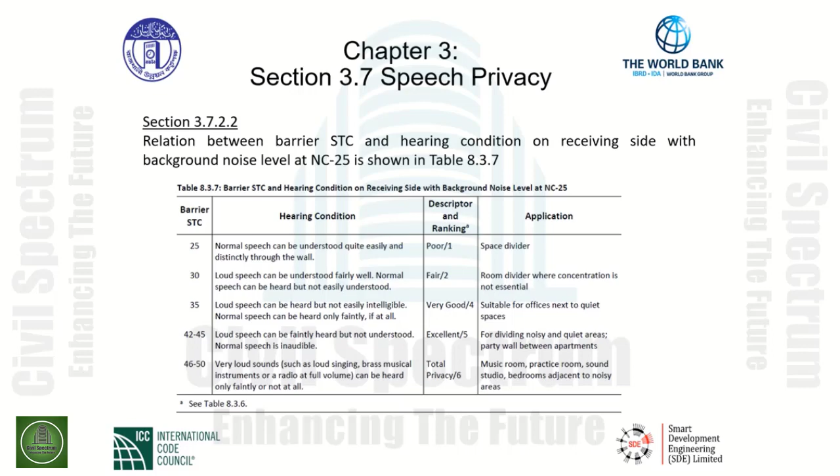As we can see here, specifically in the table, we have other STC barrier ratings as well. I can use a barrier of 30, which would give me a hearing condition of loud speech can be understood fairly well. Normal speech can be heard but not easily understood. Our descriptor and ranking would be fair, and the room divider where concentration is not essential. This would be our application in our very last column. So again, this table can be used with respect to design of different areas within our building based upon speech intelligibility.

Figure 8.J.1, Appendix J, shows the speech privacy analysis sheet, which shall be used to determine the speech privacy rating number for design of enclosed space. We can find the reference here from Section 3.7.3.1. As we look at this, we expand the explanation of the table based upon the speech privacy analysis.

We have speech rating, isolation rating, speech privacy rating number as well, that goes into the table. We have a source room factor that gives the approximate effect of the room absorption on the speech level in the source room. The scale in figure 8.J.1, Appendix J, represents average absorption. For live rooms, the factor should be raised by 2 points, and for dead rooms, the factor should be lowered by 2 points. Factors A plus B give the approximate source room voice level.

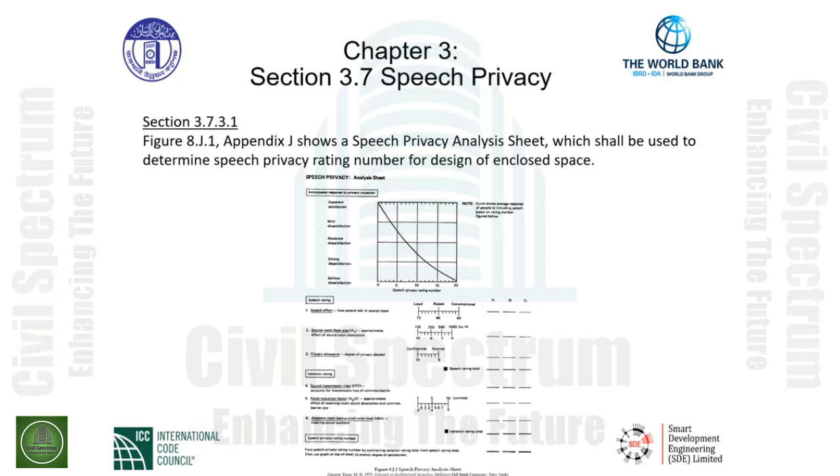Sound amplification systems in Section 3.8 are defined and required here. Section 3.8.1.1 refers us to: a well-designed sound amplification system should augment the natural transmission of sound from source to listener with adequate loudness and diffusion. It should never be used as a substitute for good building acoustic design, because it rarely overcomes or corrects any serious deficiency. Rather, it may amplify and exaggerate the deficiency.

We have Section 3.8.1.3 that provides requirements regarding spaces seating less than 500. These should not be required to provide any sound amplification system if properly designed, since a normal speaking voice can maintain a speech level of 55 to 60 dBA in this volume of space.

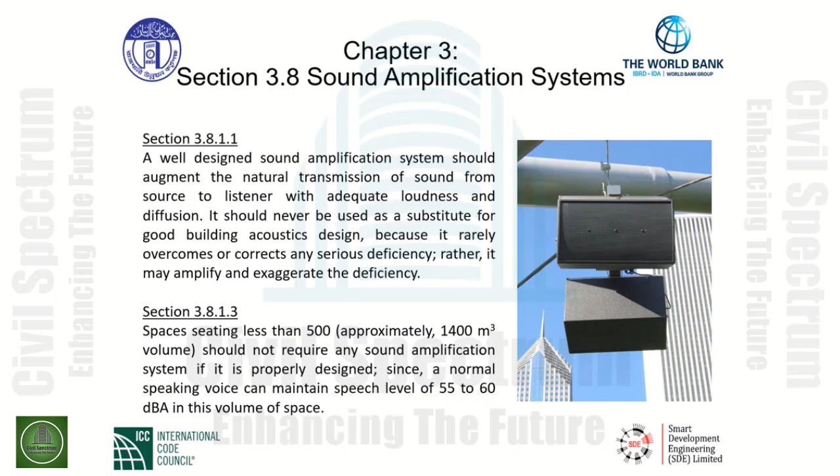Controlling noise: controlling measures shall be taken against noise coming from outdoor and indoor sources as specified in Sections 3.4 and 3.5, as we discussed previously. Section 3.9.1 mandates that space layout, quiet and noisy quarters shall be grouped and separated horizontally and vertically from each other by rooms or spaces not particularly sensitive to noise, such as entry, door, staircase, corridor, wall closets, or other built-in building components. Bedrooms shall be located in a relatively quiet part of the building. Measures should be taken to avoid transmission of footstep noise through floors.

These sections bring out the responsibility of the designer to provide adequate, quiet spaces for these areas within our buildings.

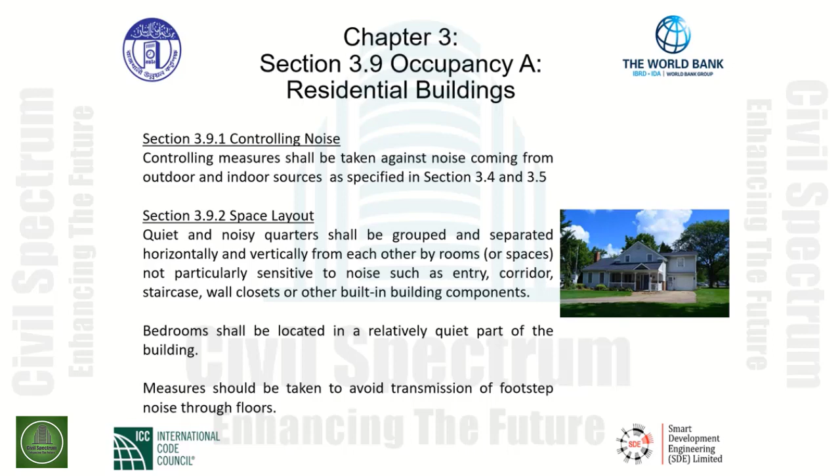Sound insulation factors required by Section 3.9.3: Grade 1 criteria apply mainly to fully residential, quiet rural and suburban areas, and in certain cases to luxury apartments or to dwelling units above the 8th floor of a high-rise building. Grade 2 criteria apply to residential buildings built in relatively noisy environments, typical of urban or suburban areas. Last, Grade 3 criteria express minimal requirements applicable to very noisy locations, such as commercial or business areas, like shop houses with dwelling units on the upper floors, or downtown areas.

Among the above three categories, Grade 2 covers the majority of residential constructions and therefore shall be regarded as a basic guide. As we saw in previous tables, Grade 2 was indicated in the tables, and if we had to make different modifications, we either added or subtracted values within the tables.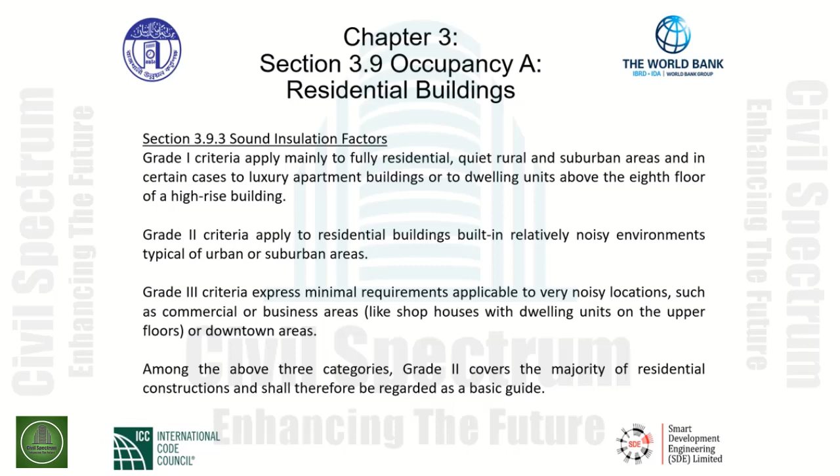Continuing with sound insulation factors: an STC rating of not less than 45 dB is to be provided in walls and floors of residential buildings, between dwelling units of the same building, and between a dwelling unit and any space common to two or more dwelling units, for reduction of airborne noise transmitted through the structure. Exterior walls shall be rigid and massive, and must have good sound insulation characteristics, with as few openings as possible. Windows with acoustic louvers might be used to protect against noise intrusion while allowing ventilation. The floor of a room immediately above the bedroom or living room shall satisfy Grade 1 impact sound insulation.

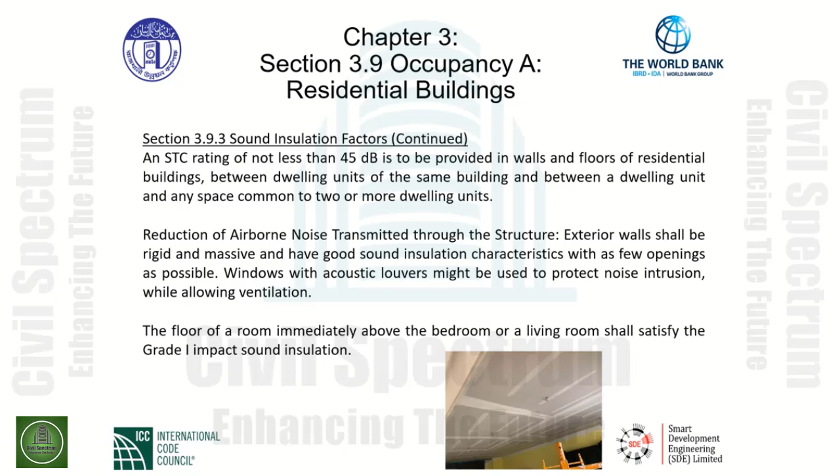Regarding outdoor noise, Section 3.10.1.1 requires that measures be taken in planning and design to control noise from external sources mentioned in Sections 3.4 and 3.5.

Section 3.10.1.2: the following sources of indoor noise shall be taken into consideration. Item A, any indoor sources such as wood and metal workshops, machine shops, technical and engineering testing laboratories, other machine rooms, typing areas, etc., which produce continuous or intermittent noises of a disturbing nature, as well as music rooms indicated in Item B.

Item C, assembly halls, particularly those attached to the main building. Item D, practical workspaces such as gymnasiums and swimming pool areas. Item E, school kitchen and dining spaces. Item F, entry lobby, foyer, lounge, corridor, and other circulation spaces.

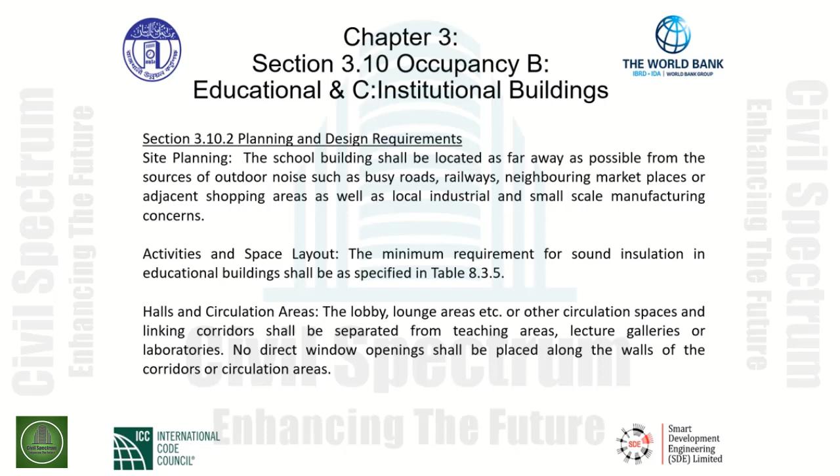Healthcare buildings, occupancy D. Section 3.11.1.1, outdoor noise: sources of outdoor noise specified in Section 3.4 shall be taken into consideration for planning and design. Additionally, healthcare service facilities like ambulance, medicine and equipment vans, store deliveries, laundry and refuse collection trolleys are also frequent sources of noise. Healthcare buildings shall be sited away from such sources as far as practicable.

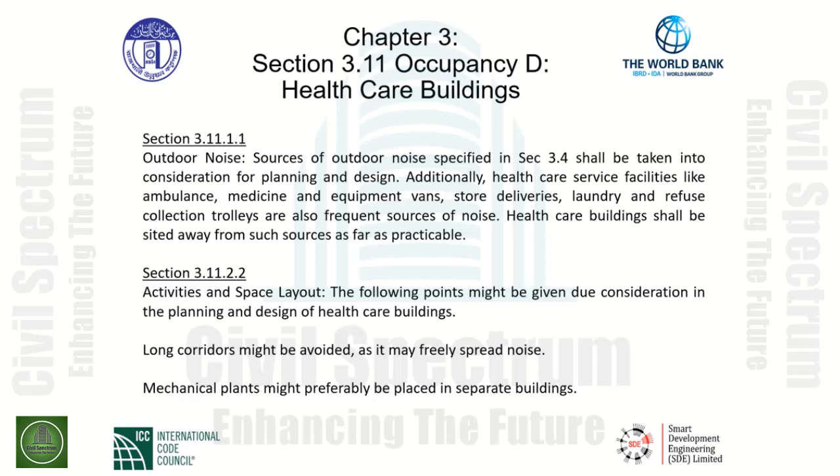Section 3.11.2.2, Activities and Space Layout. The following points might be given due consideration in the planning and design of healthcare buildings: long corridors might be avoided, as they may freely spread noise. Mechanical plants might preferably be placed in separate buildings. These are good design techniques to be followed for sound transmission ratings that may cause undue noise within the buildings.

Section 3.11.2.3 provides requirements for noise reduction in sensitive areas. In healthcare buildings, many sensitive areas such as operation theaters, doctors' consultation rooms, intensive care units, and post-operative areas shall be provided with special noise control arrangements. These rooms shall preferably be isolated in locations or corners surrounded by other intermediate zones, which ensure protection of the core area from outdoor noise.

A sound reduction of about 45 dBA between the consulting and the waiting room shall be provided in order to weaken the transmission of sound. A lobby-like space in between the interconnecting and communicating doors shall be provided.

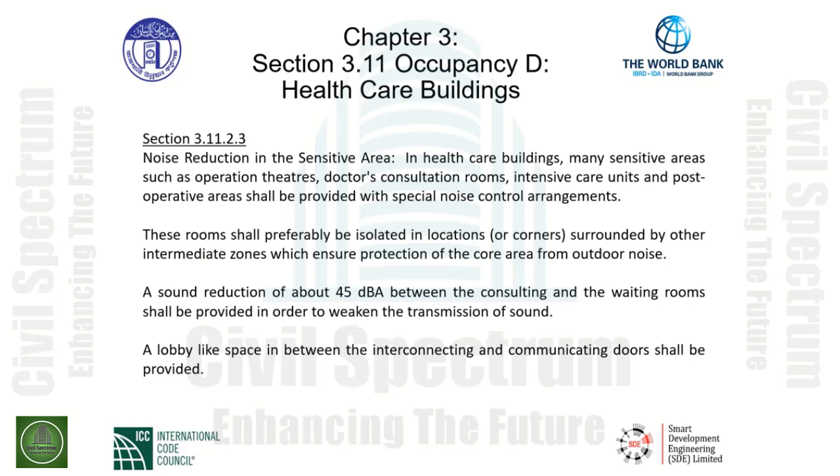Section 3.11.2.4, Sound Insulation Factors. The rooms and indoor spaces of a healthcare building must be treated with sound absorptive materials. Different STC ratings of walls specified for separate components of buildings shall be considered as follows: for airborne noise, the average STC rating of wall and floor shall be 50 dB. An STC rating of 55 dB shall be required between rooms whose occupants are susceptible to noise.

Last, all doors shall be fitted with silent closers. Doors to opposite rooms might be positioned in a staggered manner.

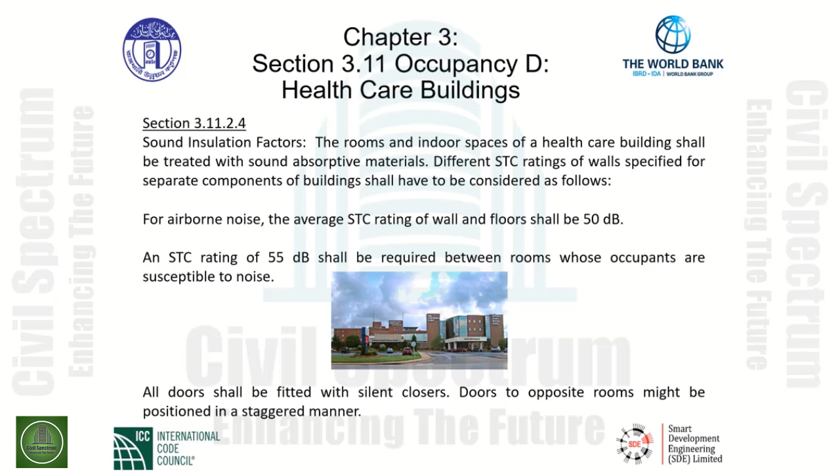Section 3.12, Occupancy I, Assembly. Regarding indoor noise, Section 3.12.2.2 indicates the following indoor noise sources shall be taken into account in planning and design.

Noise from other adjacent halls located within the same building used for similar performances or for seminars, symposiums, or general meetings. Noise produced from ticket counters, lobby or lounge areas, rehearsal rooms, waiting areas and corridors. Noise generated from other ancillary services located within the building, like cafeteria or snack bar, tea shop, post office, bank, or the like.

Noise generated from mechanical or electrical equipment, including air conditioning plants, ventilation channels and ducts, plumbing and water lines, etc., must be taken into account regarding the planning and design of assembly occupancies.

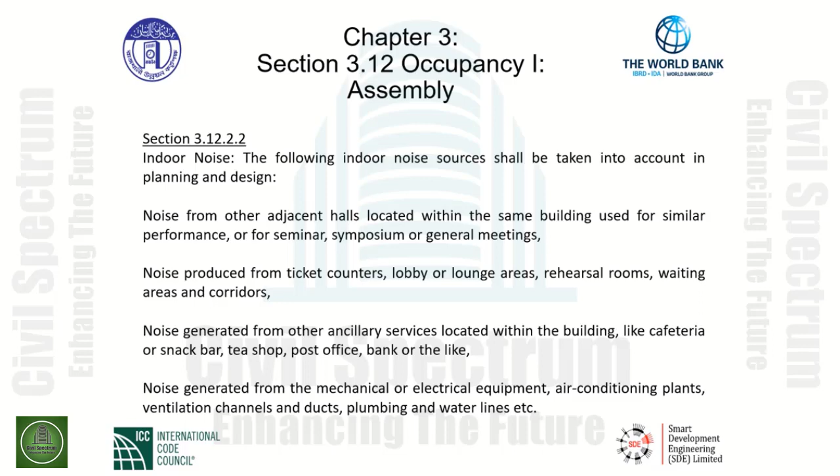The sound insulation factors regarding assembly. Section 3.12.3.4 provides requirements for rooms in the buffer zone, such as lobbies, vestibules, circulation areas, restaurants, counter and issue desk corners, and offices, etc. These shall have sound-absorbing ceilings and carpeted floors. If the rooms are to be used for the purposes of verbal instructions only, a moderate degree of sound insulation is required.

STC 40 to 45 dB shall be accomplished by the movable partitions. If audio equipment or loudspeakers are to be used, an acoustically more effective, efficient partition system shall be used with sound insulation of STC 45 to 50 dB. An insulation of STC 50 to 60 dB shall be provided if any section of the space is selected for the performance of live music. As you can see, the STC ratings go up when we have this type of live music.

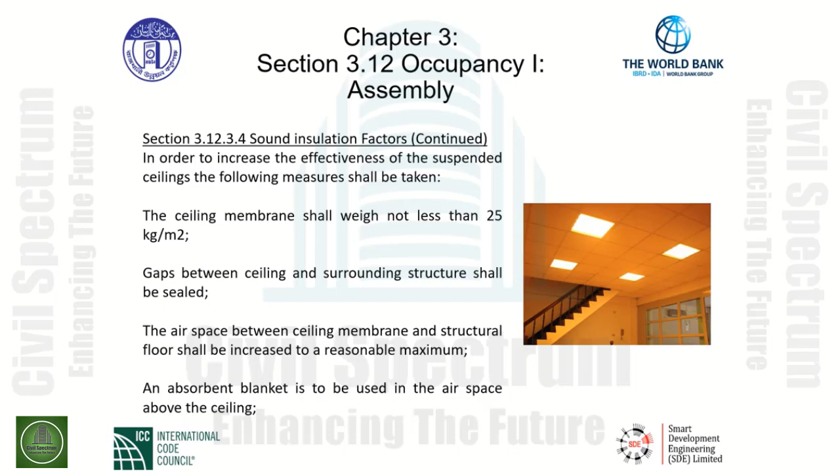An absorbent blanket is to be used in the airspace above the ceiling. This would provide plenty of sound deadening materials to slow the transmission or absorb fully the transmission of sound within the space to an acceptable level.

Section 3.13, Occupancy E, Business, and F, Mercantile Buildings. Section 3.13.3.3, Noise Reduction in Sensitive Areas. Open plan offices that are seen majorly today indicate the floor area may be carpeted in order to absorb airborne noise and footstep noise as well.

The carpet shall preferably be thick and placed on top of resilient floors, as this would be an additive effect. A highly sound absorptive ceiling with a sound absorption coefficient of 0.70 shall preferably be used to absorb 70% of the sound energy, reflecting 30% of it.

Noisy office equipment shall be concentrated into specific areas of the office space. These may be like printing machines and other business machines in the office. The space shall be treated with a maximum amount of sound absorptive material and visually separated from the rest of the office. The airspace between the ceiling membrane and the structural floor shall be increased to a reasonable maximum.

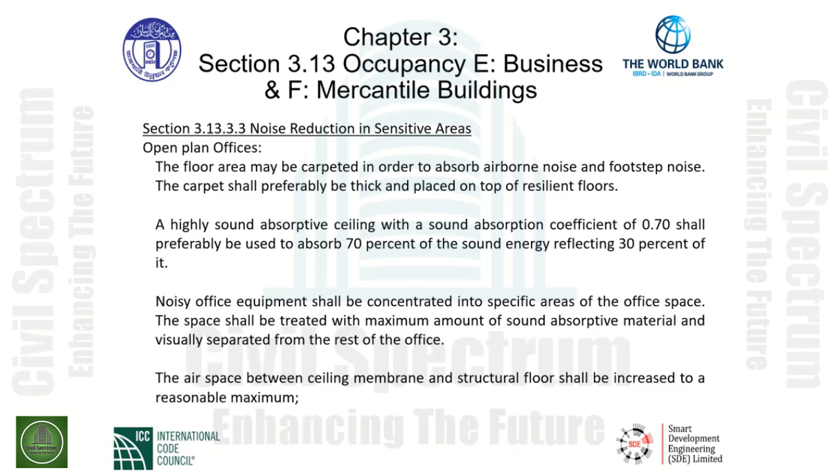Reduction of noise at source. The following measures shall be undertaken to reduce noise at source depending on the degree of noise reduction desired. The noise of slamming doors shall be reduced by fitting automatic quiet action type door closers. Continuous soft, resilient strips set into the door frames, as well as quiet action door latches, shall be used.

Machines like typewriters, calculators, printers, etc. shall be fitted or installed with resilient pads to prevent the floors or tables from acting as large radiating panels, from the vibration being attenuated to the other structural parts of the building.

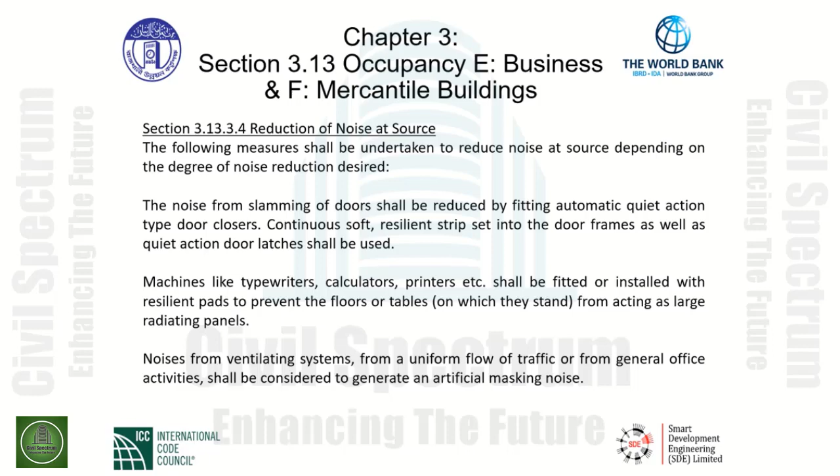Noises from ventilating systems, from a uniform flow of traffic, or from general office activities shall be considered to generate an artificial masking noise.

Regarding industrial buildings, this is covered in Section 3.14, Occupancy G. Hearing damage risk criteria is specifically covered in Section 3.14.2. This section gives us the requirements when the sound level at a particular section in a factory or industrial building exceeds the specified level in terms of magnitude and time, as shown in Table 8.3.5. Again, we need to reference back to that table for those values.

Feasible engineering control shall be applied and implemented in order to reduce the sound to the limits shown. Personal hearing protection equipment shall be provided and used if such control fails to reduce sound levels.

Interference with communication. Section 3.14.3. In industries where the operator has to follow verbal instructions during operation of the machine, the background noise shall be reduced to an acceptable level. In all cases, precautionary measures shall be taken so that the noise generated inside may not be the cause of accidents by hindering communication or by masking warning signals.

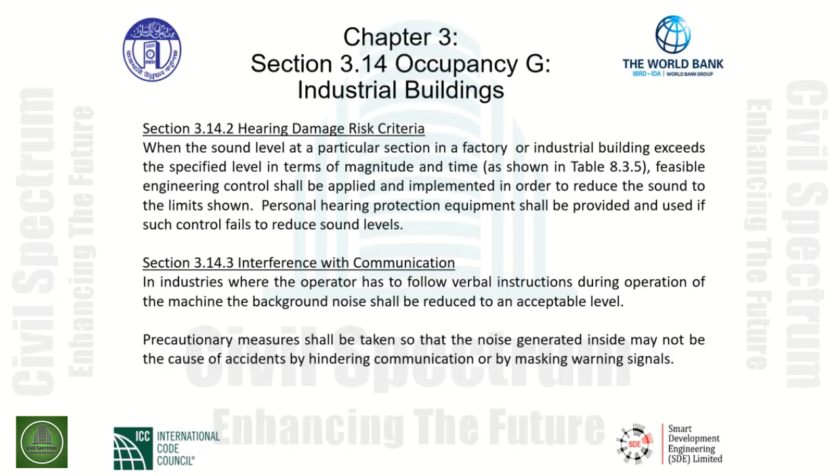Noise reduction by enclosures and barriers. Specific reference here is Section 3.14.4.2. When the plant is large, in which the overall noise level results from many machines, an enclosure shall be provided. When only one or two machines are the dominant source of disturbing noise, the noisy equipment shall be isolated in a small area of enclosure.

The enclosure shall be in the form of a close-fitting acoustic box around the machines. The box shall be of such character that the operator can continue with his normal work outside the box. If the size of the machine is large and asks for more working space, thus not permitting close-fitting enclosures, the machine shall be housed in a separate room or enclosure. The inside of the enclosure shall be lined with sound-absorbing materials in order to reduce the contained noise.